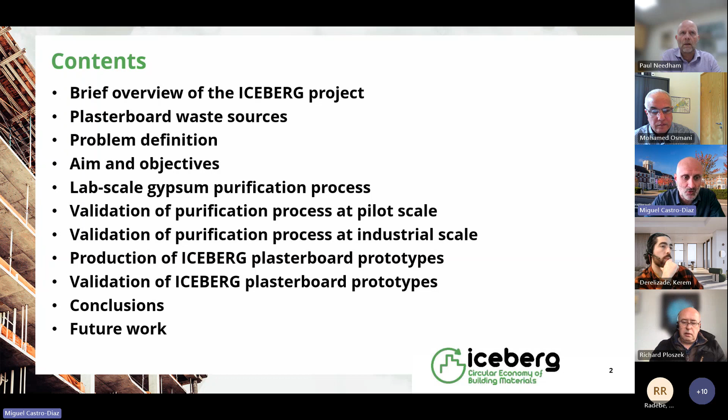It's a Horizon 2020 project. Then I will give an introduction about the plasterboard waste sources, problem definition, aim and objectives of this work, and then into the results: lab scale gypsum purification process, validation of this process at pilot scale and at industrial scale, the production of new plasterboard prototypes and their validation, and finally the conclusions and future work.

So the ICEBERG project, as I said, is a Horizon 2020 project, and the consortium of this project is 35 partners from 10 European countries. Out of these 35 partners, there are 24 industrial partners. And we are covering 6 circular case studies for 6 different end-of-life building materials: concrete, ceramics, wood, plasterboard, glass, and polymeric insulating foams and inorganic super insulation materials.

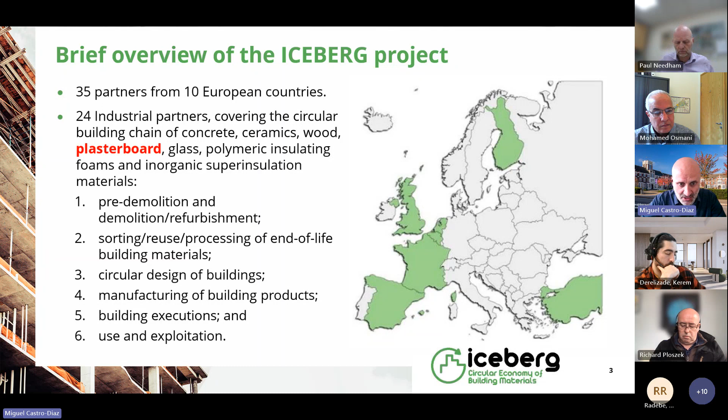So the work we are presenting today is about plasterboard, and there are all these stages in the circular case studies. The first stage is pre-demolition and demolition. Second is sorting, reuse, processing. The third is the circular design of the buildings. Fourth, manufacturing of building products. Fifth, building executions, and sixth, use and exploitation.

So currently there are 3 sources of plasterboard waste. The first source, we call it construction plasterboard waste, generated during construction projects. This waste is segregated on site, so is defined as clean plasterboard waste and is usually recycled. Then there is refurbishment plasterboard waste from refurbishment projects, and also demolition plasterboard waste from demolition projects. These 2 wastes are non-segregated and are defined as contaminated, so they are usually not recycled for that reason.

So, as I said, the current plasterboard waste recycling plants only reclaim gypsum from construction plasterboard waste through mechanical processes. One of the main challenges in reclaiming gypsum from refurbishment and demolition plasterboard waste comes from the difficulty to achieve consistent purity in the gypsum that is higher than 92%. This is due to the highly cross-contamination of the waste.

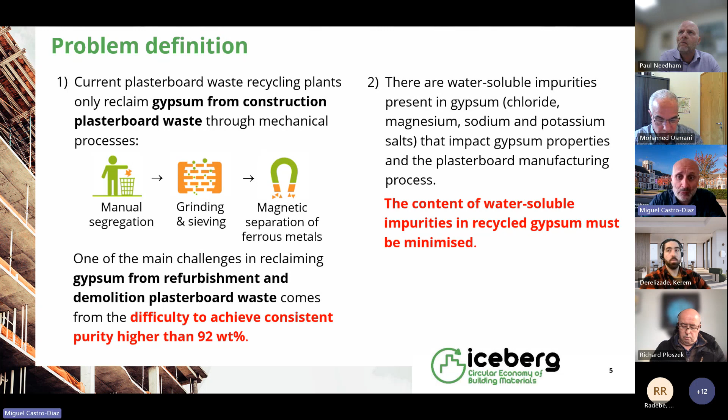So this is the current situation in the plasterboard life cycle. We have virgin gypsum mining, which provides most of the gypsum for plasterboard manufacturing, and then some recycled gypsum from construction plasterboard waste, which is also incorporated into plasterboard manufacturing. And at end of life, most of this plasterboard waste, so demolition plasterboard waste, ends up in landfill. Currently, the average percentage of recycled gypsum from construction plasterboard waste is around 10%.

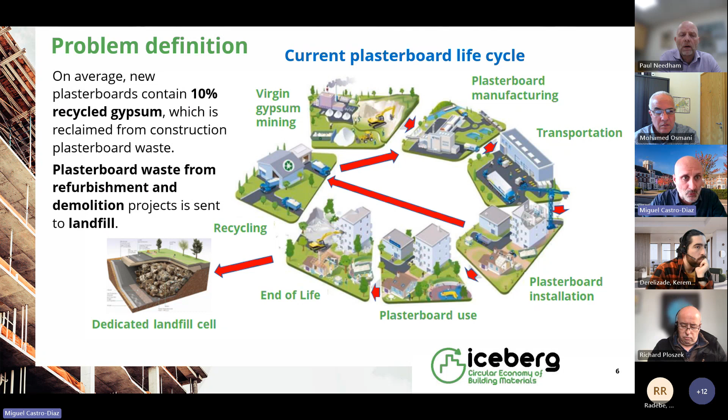And the aim of this work in ICEBERG is that we try to develop circular plasterboards with 35% recycled gypsum content, so much higher than the current 10% recycled content. And we source that recycled gypsum from refurbishment and demolition plasterboard waste. How do we manage to do that?

Well, we have developed a lab-scale purification process to reclaim the gypsum from refurbishment and demolition plasterboard waste. And we achieve consistently high purity, more than 96% in this recycled gypsum. We call it purified because it has been going through a purification process. Then we validated this purification technology from lab scale to pilot scale, and then from pilot scale to industrial scale. And then we manufacture circular plasterboard prototypes with 35% of this purified gypsum, which exceeds the average 10% recycled content in current plasterboards.

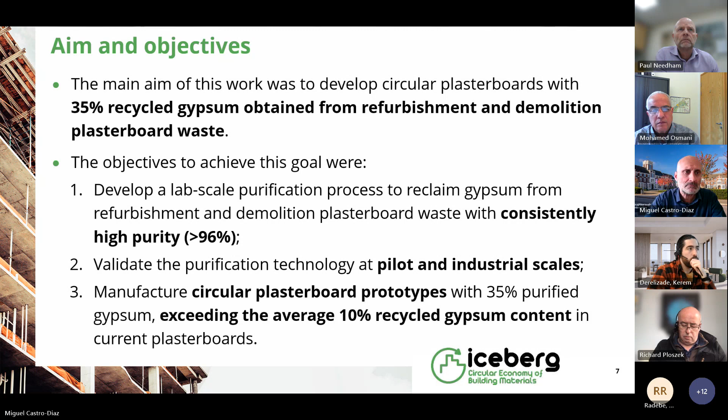So this is our aim: we increase the recycled content in the plasterboard from 10% to 35%. We increase the circularity of this product. We minimize the amount of virgin gypsum required for plasterboard manufacturing, and all the plasterboard waste generated at end of life can be recycled. In the long term, what we aim is to avoid the use of virgin gypsum mining, so then it would be a fully circular process.

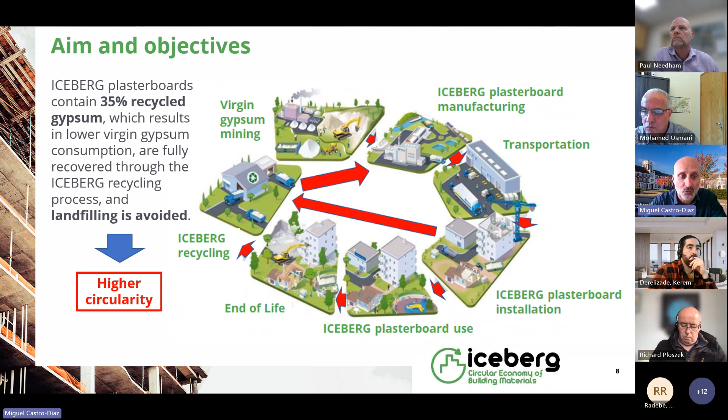Once we sorted this plasterboard, we crushed it and sieved it, and we did this continuously to crush the material to a very fine powder for acid-leaching purification, but also to remove some residual paper fibers in the plasterboard waste or in the gypsum.

And finally, we did the ICEBERG acid-leaching purification at lab scale. So we used different conditions of temperature and acid concentration. We used sulfuric acid, and then different residence times. And we found out that the best conditions to maximize the removal of impurities was doing the acid-leaching purification at 90 degrees, with a concentration between 5 and 10% sulfuric acid in water.

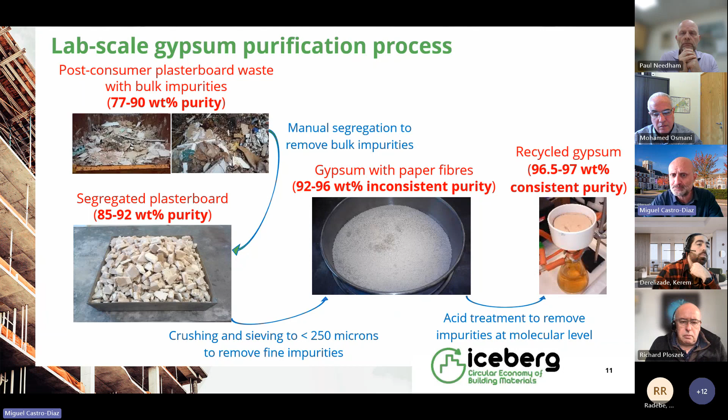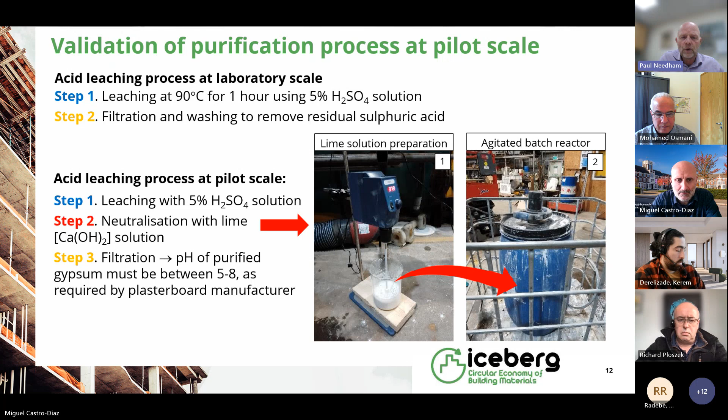So we carried out further tests, and it was suggested by the team in Paisley that we actually use a lime solution rather than a slurry. Trials using this material proved more successful, and we were confident that we could achieve consistently a pH of between 5 and 8. So we then moved on to the industrial scale, but the pilot scale was very useful for us to understand the process and understand where the pinch points and challenges were in terms of setup.

After that we allowed the purification process to sit there for 2 hours to make sure that we'd achieved full purification. From there, we would add in the lime solution to achieve the required pH, through hourly testing. We would check the pH of the material, and from there, if extra lime was required, we would add it.

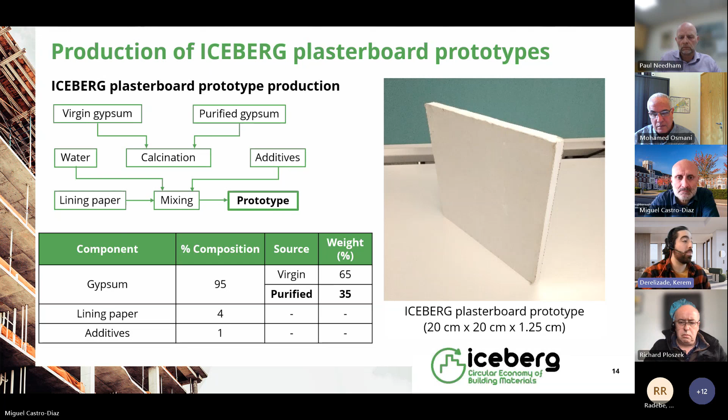If you can move to the next slide, Miguel. We test the surface hardness, flexural strength, and thermal conductivity for both standard plasterboard and iceberg plasterboards. For surface hardness, they're literally the same, we haven't seen any change. For flexural strength, the iceberg one is slightly lower than standard plasterboard, and for thermal conductivity, they're really close, with slightly higher thermal conductivity on the iceberg plasterboard side.

Thank you, Kerem. So in terms of main conclusions, although there are some variations in the properties of the iceberg plasterboard compared to business as usual, the iceberg plasterboard fulfills all the requirements in terms of surface hardness, flexural strength, and thermal conductivity established by the British standards BSEN 520 and BSEN 12524.

As we mentioned from the beginning, plasterboard waste is sourced from construction, refurbishment, and demolition projects, but only gypsum from construction plasterboard waste is currently reclaimed. The industrial scale iceberg acid-leaching purification process has been proved to produce consistently high purity gypsum, more than 96% in chemical purity, coming from refurbishment and demolition plasterboard waste. This is the first time this has been achieved.

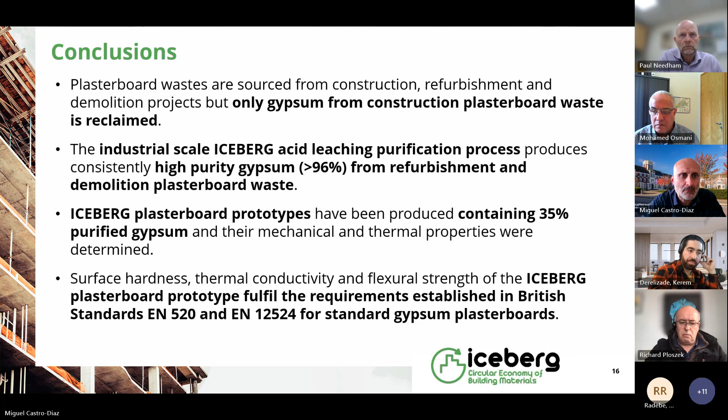In terms of future work, as you saw before, what we got after filtration in the industrial scale acid-leaching purification process, that purified gypsum, was quite wet. The water content was 50%, and we need to reduce that to less than 10% in order to be used for plasterboard manufacturing. At lab scale and pilot scale that is very straightforward, but at industrial scale we need to dry tons of it, and that is very time consuming. So this is work in progress, and it should be followed up in the next few months.

Once the material has been dried to less than 10% water content, that purified gypsum can be sent to the manufacturing site, and the iceberg plasterboard can be manufactured. The process is exactly the same; the only difference is the ratios of virgin gypsum and recycled gypsum in the plasterboard product. The conditions are exactly the same. Finally, the iceberg plasterboard will be installed in a building, depending on the requirements of the construction company.

And that is all for our presentation. If you have any questions.

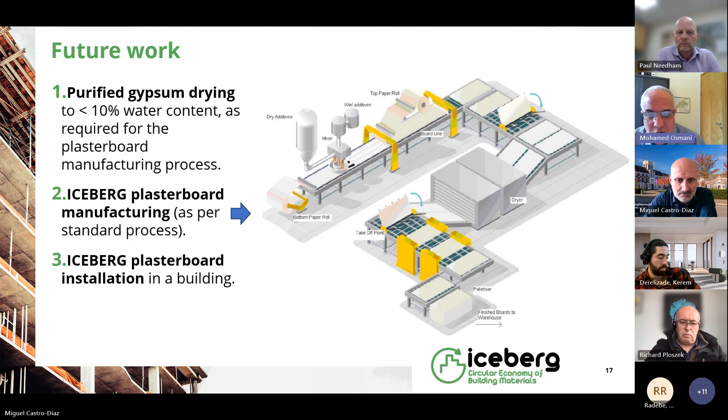So maybe I'll start with a question, Miguel, regarding the acid purification process. In the end, you come up with a lot of wastewater. So what happened to the wastewater, please?

Yes, the wastewater in this project, we haven't treated it at industrial scale, for the simple reason that the volumes were too excessive and were not economical in the project. So this was not anticipated. However, we did some lab tests for the wastewater, and we found out that this wastewater is basically sulfates of calcium and magnesium.

We can treat this wastewater to recover a magnesium-rich gypsum by adding lime, which precipitates out and can be commercialized as a fertilizer. Once we remove this precipitate, the remaining water can be reused in the purification process, added back into the tank shown in picture number 2, without impacting the efficiency of the purification process.

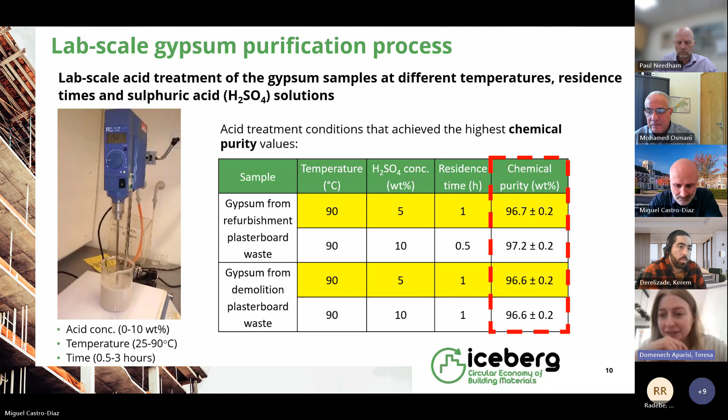Hi, hello, thank you so much. Sorry I arrived late today because I was in a previous meeting, so you might have already discussed this and I might have missed it. But I wanted to ask you, the samples for plasterboard, did you collect them from mixed waste in construction sites, or were there especially selected pieces of plasterboard collected before demolition?

We found cans, metal cans, and we found wood. We found all kinds of waste in there. So we had to collect the material from this skip piece by piece, but we also collected some waste to make it representative of the sample. We were also collecting some of the typical waste we found in this skip.

In terms of the demolition plasterboard waste, it was the same case. We collected this waste from one of the recycling sites from ENVA, located in Leicester. We collected it from a big pile of plasterboard waste, but it was even worse than the skip - unbelievably contaminated. We even found plasterboard attached to foam, which was really difficult to segregate, but we still collected that waste because it was representative.

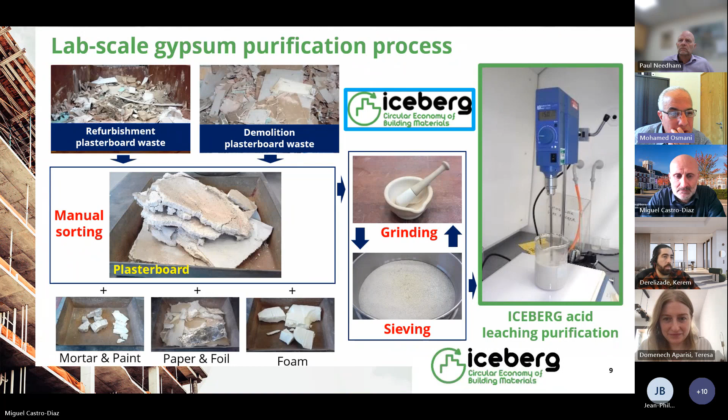So, for example, for the flexural strength, the ICEBERG plasterboard prototype was much lower than the business as usual plasterboard.

Is there any implication in its installation, in its application? Do you think it would be applied specifically to some plasterboard types, because it's lower?

I don't know. I don't have an answer for that one right now. I have to go and check to see if there's a specific standard for different applications where we can use it. And again, these are small scale tests, it might be even much better once we do a much bigger production, a proper plant scale.

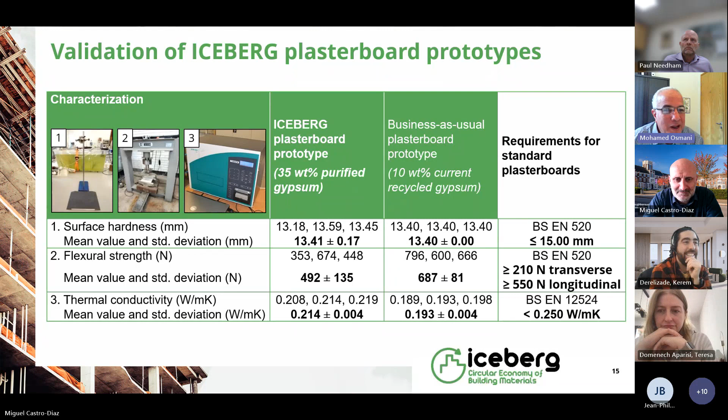Again, maybe my question, because I want to ask a question for each, for Miguel, Kerem, and now Paul. So Paul, your experience in ICEBERG with recycling of plasterboard - what do you think about the near future of plasterboard? Is one of the biggest issues for recycling the feedstock? Is there enough plasterboard that could be recycled so that we can replace virgin gypsum with recycled gypsum? Do you think there's enough sources of plasterboard in the market?

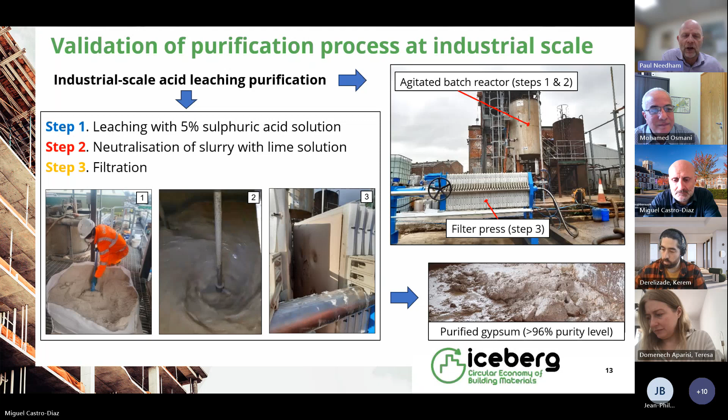Yeah, I look at it, there is plenty of plasterboard that appears to disappear out of the market, and it doesn't particularly go to landfill as dedicated plasterboard. I think it just disintegrates as part of a demolition project, it tends to go out with hardcore and fines material. What we've got to do is create a model that attracts demolition companies, refurbishment companies to actually segregate the material, and we can offer a service that is cost effective for them, that makes it attractive for them to segregate the material at source, so that we can recover this material that's currently lost, and then it can be reused and can displace your mined gypsum.

So really, I think it's a combination of legislation and financials. The landfilling of plasterboard in mixed landfills has been banned for almost 15 years, so you don't see an awful lot of it going into landfill, but it's certainly disappearing in fines, and we've got to encourage people to do more segregation at source. You look at this here, potentially 700,000 tons per year of plasterboard that could be recycled and reused. I think this project has been very useful to see what the opportunities and challenges of processing this material are, but it's certainly a good step forward, and there's an exciting future here in recovering this material and getting it back into the supply chain.